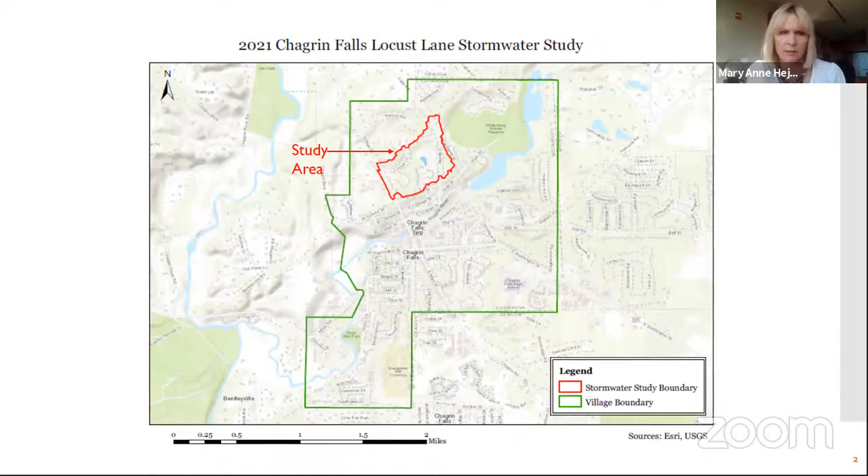So within the village boundary, you can see our study area is in the north central, northwest portion of the village. At the downstream end of our project, the water meanders to the western side and exits towards the Chagrin River. Overall, the study area itself is about 75 acres. As the mayor pointed out, Willow Lane and Locust Lane are the borders on the north side. East Summit Street is our southern border, and the parallel streets of North Main and North Street border us on the east-west.

So Josiah is going to step through how water flows through the watershed. He's going to show you some green arrows and some blue arrows. The green arrows are our closed pipe system, and our blue arrows are going to be the open stream.

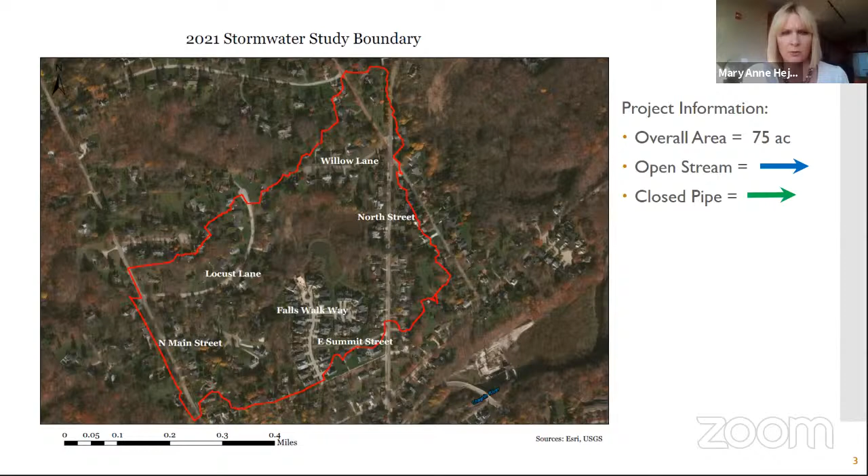So about 30% of our network, we have about a 2-mile network, 30% of that is open stream, and about 70% is the closed network. So Josiah, I'm going to turn it over to you.

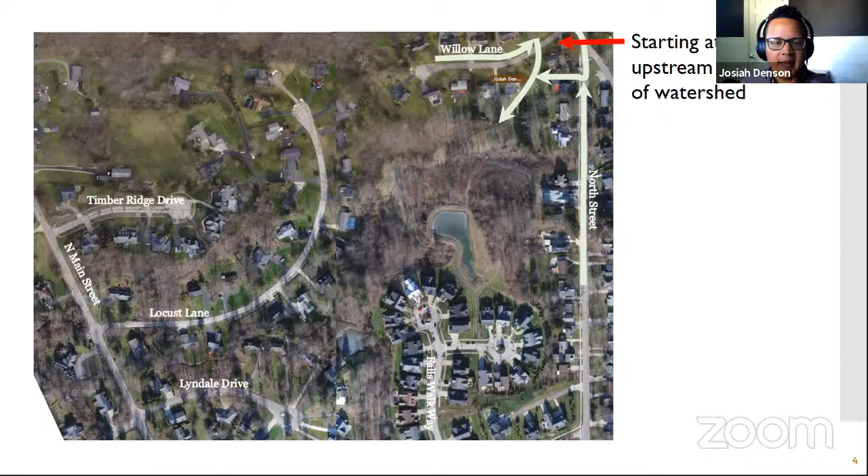It goes about halfway down the street until the crest of the hill. And that flow heads north towards Willow, shoots over to the west, and then starts heading southwest towards Locust. From that point, it does turn into open stream here in this section. And then it kind of meanders its way down and makes it to Locust Lane,

where it then kind of takes a turn to go parallel with Locust Lane for a while in the man-made channel that I'm sure many of you know, at this area right here. Then it dips back behind these two houses, comes back up, crosses Locust, and then takes a turn into another culvert that heads towards North Main over here. And this is where it exits the system over here. So if you go to the next slide,

additionally, it takes in this new development of Falls Walk and Pear Tree Circle over here. The flow from those two streets goes into this retention basin here, which is then outletted at a controlled rate out of this outlet over here. And then it heads through these little wetlands, woodsy section, and meets up with this open stream that comes into Locust here. And then finally, there's an area.

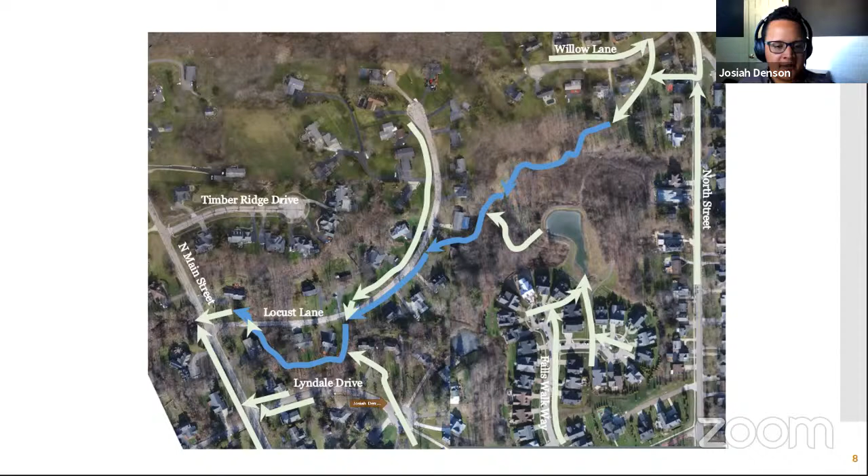Oh, there it is. Okay. There's an area down here to the south that it also takes in from Lyndale. There's a culvert that takes in some catch basins at the end of the cul-de-sac here and kind of juts across a few people's yards to meet up with the stream in the back here. And then it also takes up some newer storm sewer that's on North Main Street here, as well as a couple catch basins on Lyndale.

Okay, so in addition to that, we've got some drone video that we can kind of talk through and show you. So I'm gonna stop sharing my screen, but basically I wanna show you the drone video. The drone's gonna go exactly the way Josiah just explained, upstream to downstream, east to west. So let me see if I can get that for you. And I will share that. Let me know when you see that. Looks good. Yep. Okay, great.

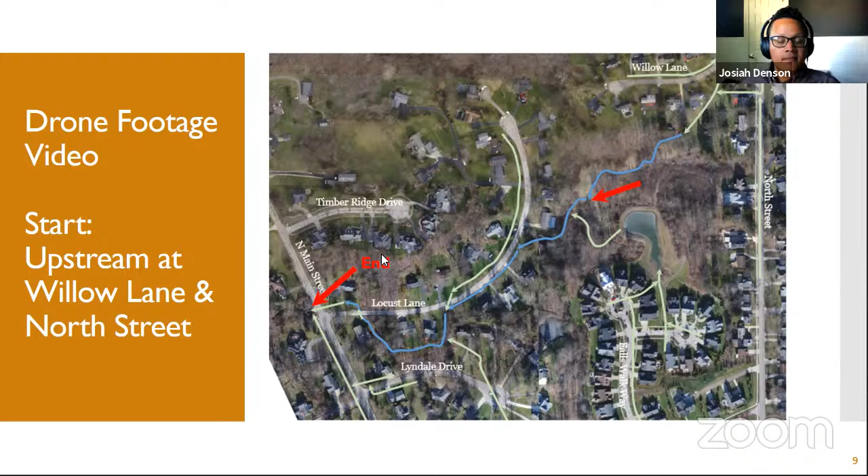So I will close that out. Whoops. And we'll get back to our presentation for you. Okay. And let me know if you can see it. Yep. All right, great. So Josiah, go ahead and pick up from there and kind of explain our 3 different types of equipment. He's going to explain to you what we got out there.

Okay, so yeah, an important part of the process while we're doing this study and trying to build a model of the system is doing some metering and trying to understand what the real life situation looks like when there's a rain event. So to do that, we have a couple different types of technology. One that we use is a flow meter, also called an AV meter for area and velocity. So those are shown in green here. Let me real quick. So these green dots here represent where we have those flow meters.

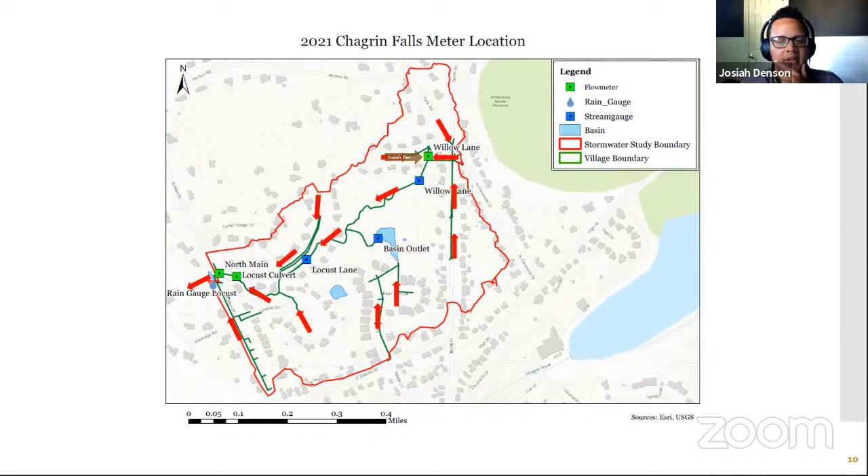So basically, those are meters that we typically put inside of a pipe, and it gives us 3 different pieces of information. It gives us the flow rate through the pipe, the velocity that the water is traveling at, and also the depth of the water in the pipe. And having those measurements really helps us out in understanding what the system is doing, how it's performing during rain events and during flooding events.

Another type of meter that we have is a stream gauge. So they're represented with these blue squares here. And those are basically just depth sensors. So we typically put these in pieces of open stream so that we can understand how the depth levels are fluctuating, both during dry weather and during rain events.

And then the third type that we have is just a rain gauge, which in our system is located at the very downstream end. It's actually in the fence of the pump station that's right at the intersection of Locust and North Main there. But basically, this just gives us a more accurate understanding of how much rain we're getting, what intensity it's raining at, and how long the rainstorms last.

Just real quick to walk you through our locations of these. So the flow meters, we have one located basically in the backyards of Willow Lane. And it is up at the upstream section about where the drone started. And Mary Ann was saying that the flow was coming from North Street here and kind of crossing between these houses, right where the Willow flows and the North Street flows come together right there. That's where we have a meter, just to try to understand the flows that are coming from this upstream section here.

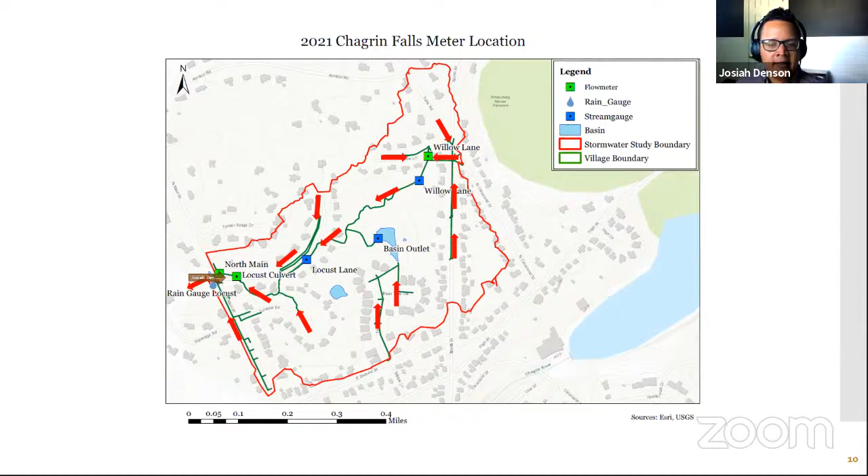So I think we can move on.

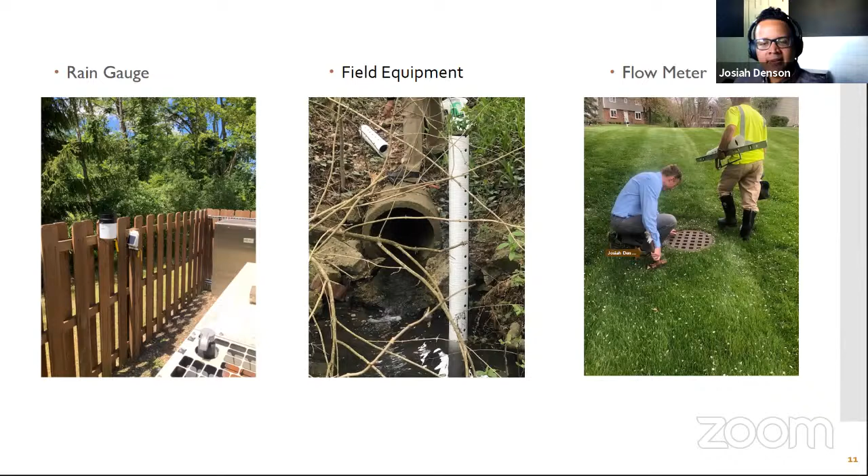Yeah, I think that's okay.

So typically when we install these flow meters, we try to put them in manholes for security reasons and just to make sure that they stay safe and dry if we can. But basically the flow meters themselves have two main components. One of them, as noted down here, is the AV probe. So we put that inside the actual pipe. It's like a very small, like a couple inches probe that we put on the bottom of the pipe and kind of strap it on with a stainless steel band.

And then that's connected to a bigger piece of equipment that is the logger itself that collects all the information and typically has a wireless modem attached to it so that it can wirelessly send us the information every 5 minutes while the data is coming in.

Sometimes, well, also, can you go back real quick? Sure, sorry. No, it's okay.

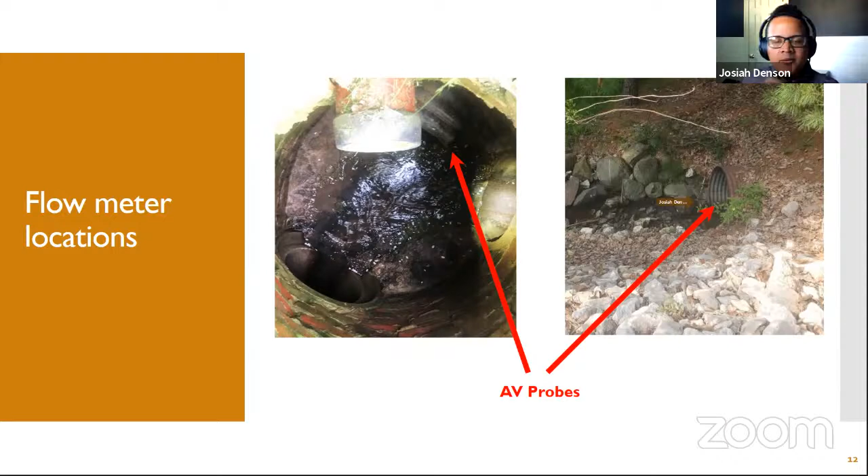This is that manhole that Tim was looking down into on the left here. And then this one on the right is on Locust. It's that small section on the north side of Locust right after it crosses the street and right before it starts heading towards North Main.

Okay, you can move on.

Most of the time, our meters are able to send us information wirelessly, but sometimes they're not, and we will need to go out there and manually download the information, typically every month, sometimes a little more often. And we'll have to perform other maintenance on it, like replacing the batteries like Brian's doing here. But just to give you an idea of what an installation would look like.

So it's kind of hard to see, but in here, there's two boxes. One of them is the modem to send the information over. And then the other one contains the batteries and the logger itself collecting the information. And then here's the antenna that sometimes can help give it better reception. And like we were pointing to before, the actual probe taking the data is down in the pipe.

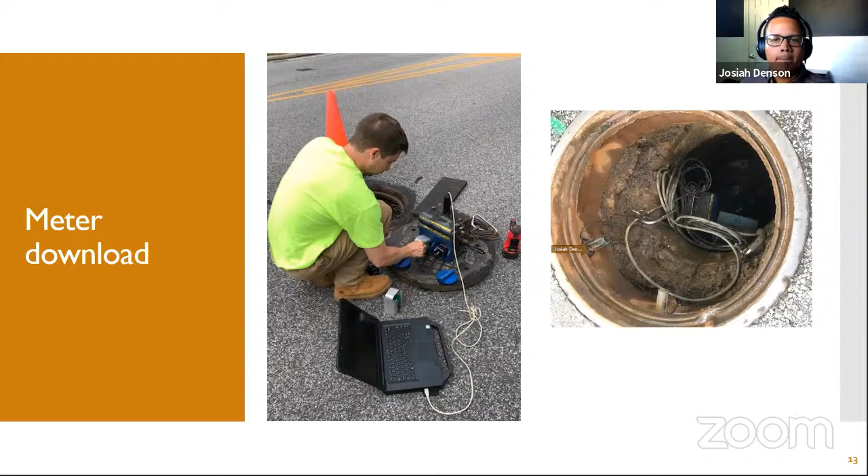Okay, so as Josiah pointed out, our model is only as good as our data is. So we take great care in making sure that we have a good system to present reliable data. So what do we have at this point? We installed our first meters at the end of April.

We're looking to get as many rainfall events as we can capture to be really representative of the system moving forward for the design years ahead. So what does that look like so far? Well, we haven't had a lot of rainfall this year. That's what I would say. So all of these data points are significant for us.

So the amount of rainfall, how strong it is, how long it lasts, how dry it is before the event, and what's happening in the meters. What's the maximum depth, the velocity, and the flow. So we take a look at all of those. In May, we had about 3.5 inches of rain. That's kind of on average for the area.

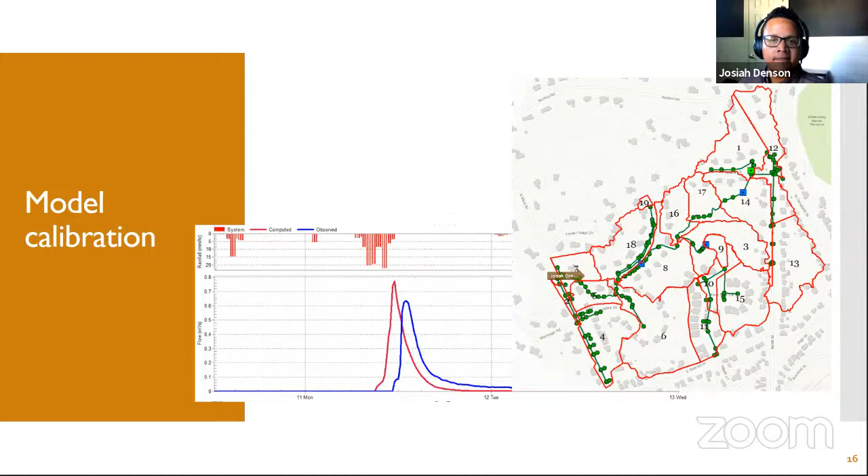So we also wanted to walk you through part of the model. So this is the downstream end of the system. You can see that this is on Locust Lane at the intersection of Main Street. What we're looking at here is this highlighted section that starts here and ends down over here. Where I'm pointing now is the outlet of the system, the downstream most end of the system. That's where it outlets into the stream that eventually heads to the Chagrin River.

And just moving upstream from here. If we start at the outlet, there is a 3x4 culvert that goes under North Main Street here, and then another 42-inch pipe that comes up to the road at Locust here. There's a small section of open stream, and it crosses the street under the road. And then from there up to this point over here, behind this home on Locust, is all open channel stream. So if you go to the

next slide. Can I ask a question? Yes. Can you please go back? What is the culvert under Locust before it daylights upstream? Right here? Yeah, underneath Locust there. I said that's a 42-inch. This one under, I believe, is a 36. If you go to the next slide, it says for sure.

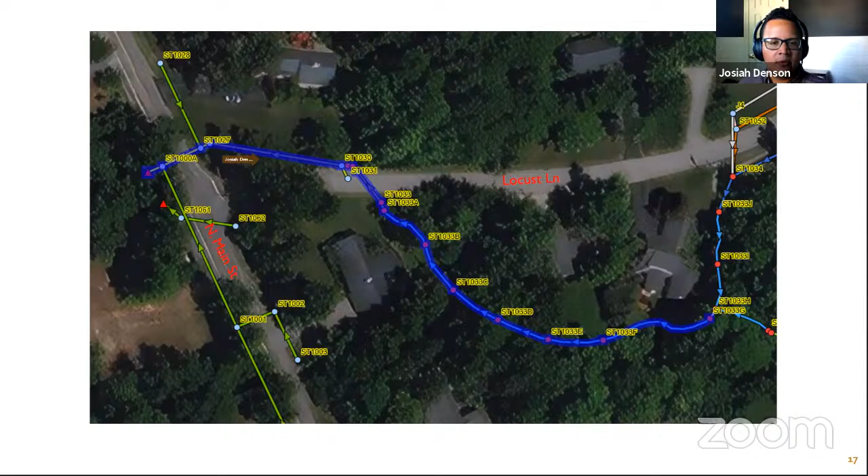Okay, that's a 30-inch under Locust, and then the 42 is the one, if you go back, this one up here that goes towards North Main Street. That one's an old corrugated metal pipe. I think they're actually both corrugated metal pipes. Okay, thanks. Sure.

And then it outlets for a very short section and takes a turn into this 42-inch pipe that just goes under the yard of 302 North Main. And then there's a catch basin right before the road where it transitions into a 3x4 concrete box that then outlets on the other side of North Main.

So real quick, I saw that we're running a little low on time. I want to show you. So do you want to share your screen? Yes. Okay.

Okay, so just want to show you a quick video of what we're looking at when we're running this model and we're watching a storm happen in real time. Basically, we'll go through real quick the process of the storm. You'll see the water start to build up as the rainfall comes. And you'll see that this pipe under Locust is struggling a little bit and starting to back up the system upstream.

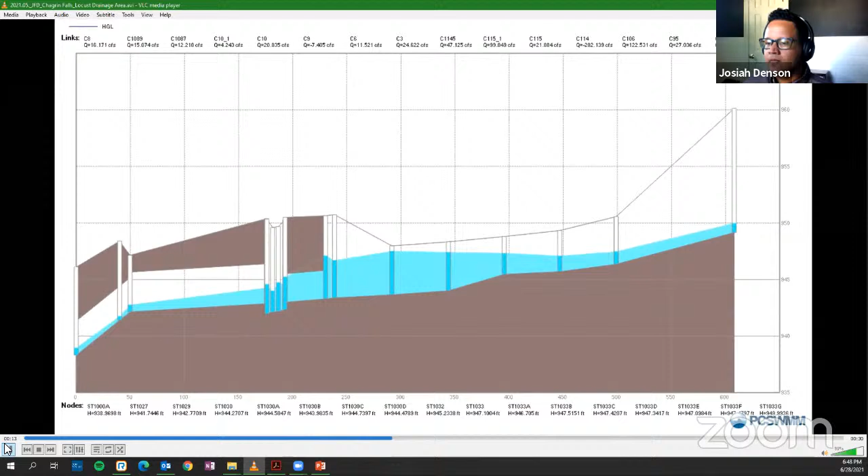Okay. I think, Josiah, didn't you say that's approximately about 4 inches of rainfall in 24 hours? Yes, that's what it looked like, and we haven't had that yet, right? That's correct. That's a theoretical flow at that intensity. Okay, thanks.

Tim, is there anything else you'd like to add? Because we're going to have to wrap this up, and I'd like to give any people in the audience an opportunity to ask questions. You're muted, Tim. Tim, you're still muted, I see.

There you go. So just the culvert under Locust, this study will help us size that. Since it's scheduled to be replaced, it's a needed replacement just due to condition. And we didn't want to just size it for the downstream capacity until we verified that that was the proper size. So this all helps get the right pipe size there, not spend too much money and not spend too little and have to redo it 10 years down the road. So that's all. Okay, I appreciate that.

So when do you think we might have the data to make that decision? That's a good question. It was nice to have that 2-year storm last weekend. That really came in handy for metering. You can wait months for a storm like that to help set the calibration. So probably in a month we'll have the data. Does that sound about right, Josiah? Yeah. And if we get more storms from the meters, it'll be even better. It's supposed to storm all week, so.